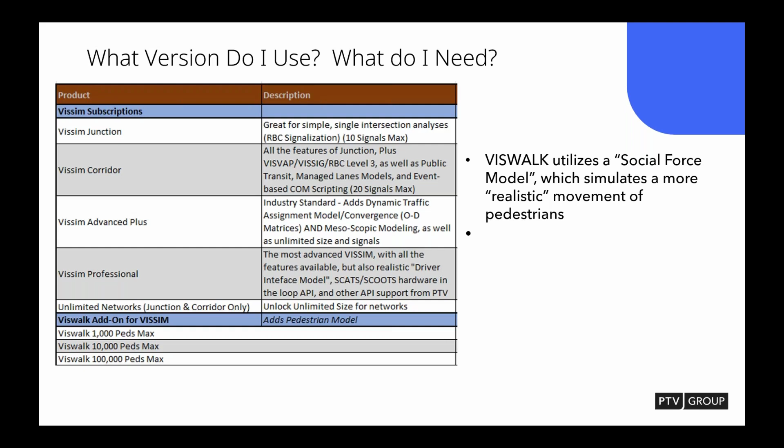When we're talking about VisWalk, some people do use it as a standalone. I have seen it, but most people come back to me to get VISSIM. It's designed as an add-on for either 1,000, 10,000, or 100,000 pedestrians maximum at any one time. So that's within the model at one time. So if you have millions over the course of a day, but no more than 10,000 at a time, that might be for you.

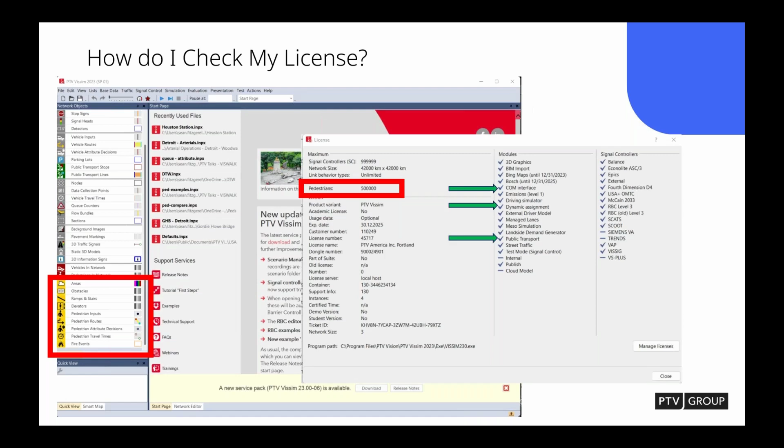So I recommend you figure out what you have. You want to go up to your help and look at your license. Here I pointed out a few things on your screen. Here you can see your number of pedestrian licenses you have. You want to look for things like dynamic assignment, that shows you Advanced Plus; public transit, that shows you at least Corridor; COM interface, Corridor; your different signalization features. So once you know you have that, you will know what features you can use going forward. All right.

So if you want to back up all the way to the beginning, the very basic way of pickup and drop off in simulation is basically a quote unquote handoff between the pedestrian and vehicular environment in both directions. So your VisWalk handles all forms of pedestrian traffic, while VISSIM handles all wheeled traffic, including cycles, which I didn't have in here. And VISSIM and VisWalk is really the only truly native pedestrian vehicular model of all the models. And I say native, i.e., push button and it works. They hand off perfectly between each other.

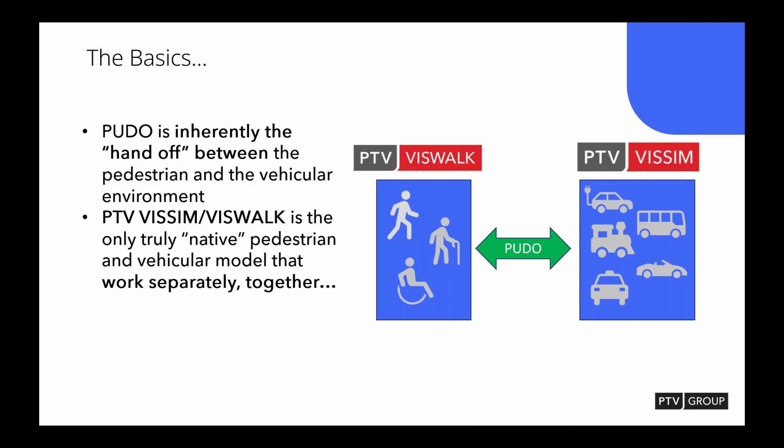So my favorite method for doing pickup and drop off is what I call the public transit method. And the reason why is because of the advanced ability to create, track, and analyze how people are getting in and out of vehicles. And it's really quite cool, and it's the only program that does this so accurately, which also in turn allows for realistic replications of the delay time due to boarding and alighting.

If there's a lot of people crowded, it takes longer to get in around them and into the car. If the doors are all the way in the back or on the other side, if they're double parked, all of these things are relevant to the operational impacts, both to the pedestrian and the car picking them up, as well as the other pedestrians around them and the cars around them as well. And with the VISSIM VisWalk interaction, you can get all of these things both in the input and the output direction.

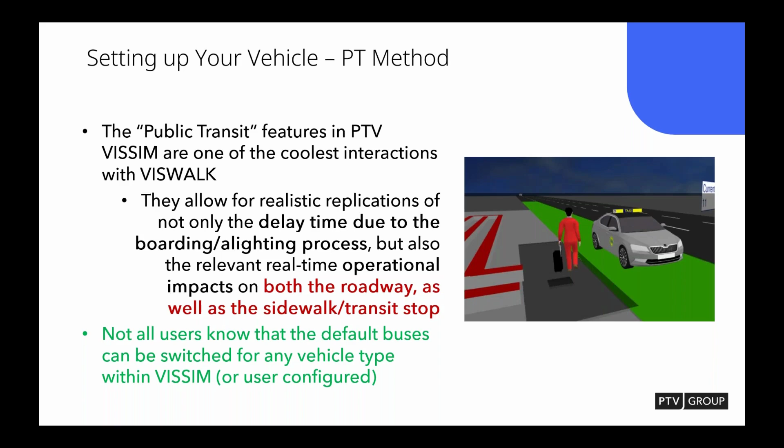Very few users know that the buses can be switched to really any vehicle type within VISSIM or user configured. I often, when living in Europe and in New York City, would just make my own that didn't exist. So, got to ask yourself, this isn't the only method. Is this method for me? The pros: most realistic boarding and alighting. You get all the delay waiting statistics, the density analytics statistics. What this is really great for is drop off.

So you can set all kinds of vehicles to drop off, and then when the vehicle drops off, it automatically creates the pedestrian and creates them into the VisWalk world as a starting point. So you don't need to be like, when the vehicle arrives, create a pedestrian. All of that has happened natively with VISSIM.

The cons: it's significantly more demanding. The way that it's designed from scratch is that public transit has schedules, so they want you to put in the timing. In the past, we have fixed this by using flight schedules and statistical analysis. You can use attribute selection and, in the past, scripting to get a controlled distribution of vehicles this way, but it's really much more difficult.

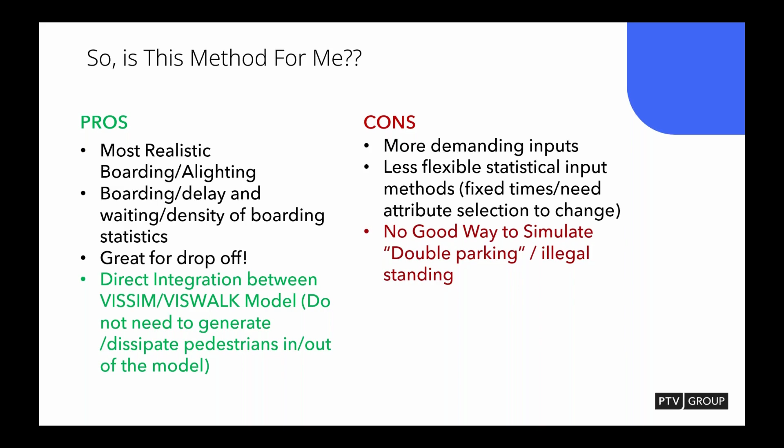And there's really no way to simulate double parking or illegal standing because the public transit vehicle needs to be next to the curb. All right, it really wants me to move to the next one, so let's just go to VISSIM.

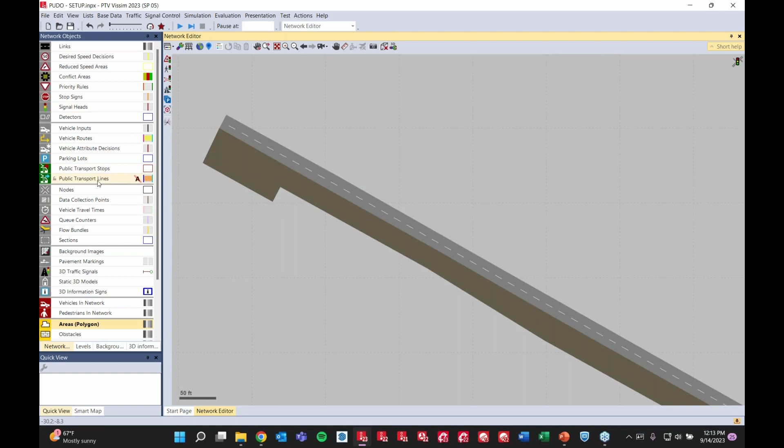Today, I'm not going to be showing the crazy, amazing Detroit Airport. I'm going to be showing simple stuff. All right, so the simple: you've got a road and you've got a thing here, right? So when you create your public transit line, let's come over here. You'll see here that you have your vehicle type. You have all your built-in ones here, but I don't really want to use any of these. So let's just keep it like that for now, right?

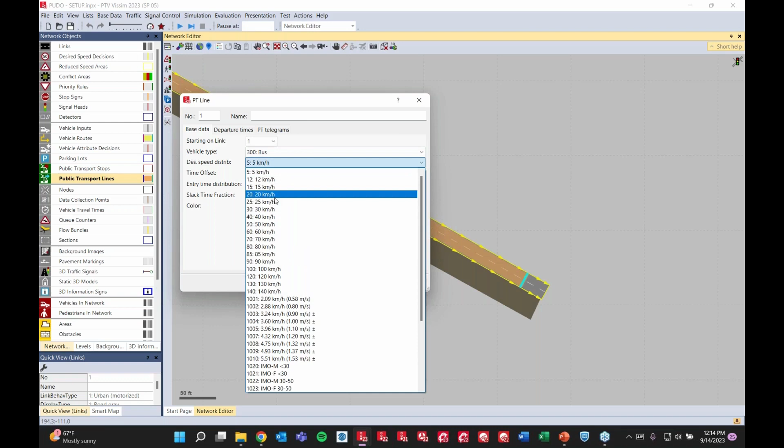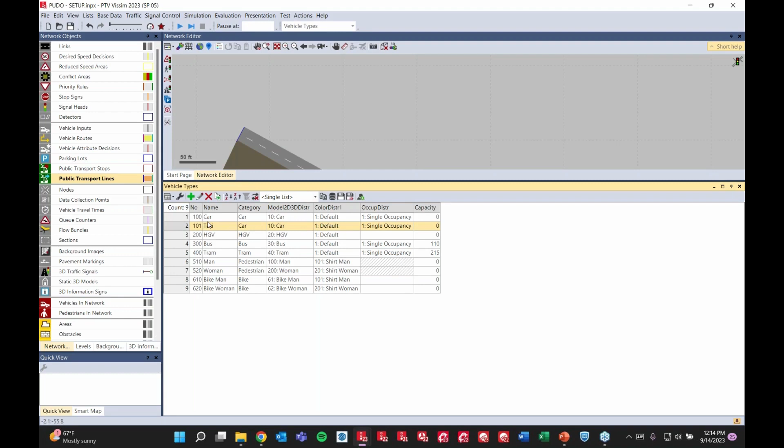So I'm going to come in here to my vehicle types. I'm just going to duplicate this guy here. Let's call it 101 taxi. All right. Perfect. Now I've got that taxi. Here I can change the capacity. VISSIM isn't really designed from scratch to have vehicles be carrying people in and out for some reason. So here I like to set the capacity to 1. You can do 2, 3, 4, whatever. For the simplest way, I like to just say 1.

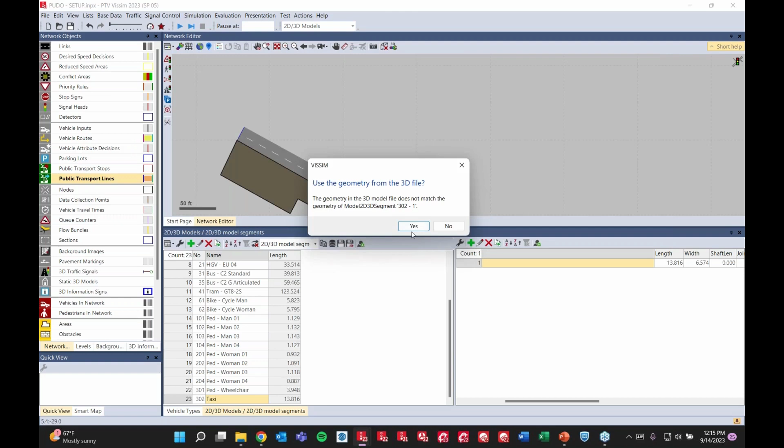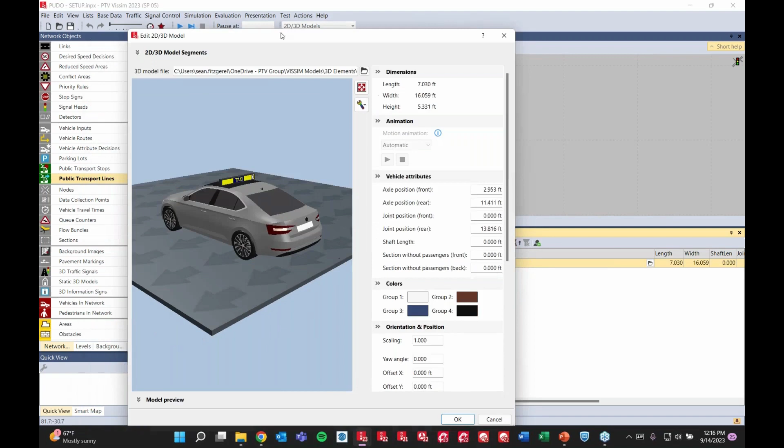Let's just for fun also create taxi. I can go in here and I can add here. All right. I don't know what just happened. Okay. There we go. So now I have this available here. And I want to go into these 3D models.

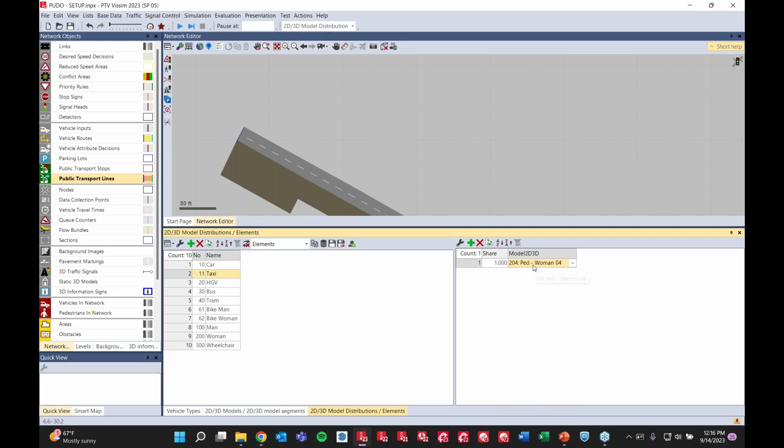This is why I like to show this, because it requires a few pedantic changes. So I'm going to bring this. I don't see my taxi. Anyway, so then when you come in you can change this here. And so when you run your simulation, you have the vehicles like that. See, this is the hard part. You actually have to put in your rate for it, or some kind of manual thing.

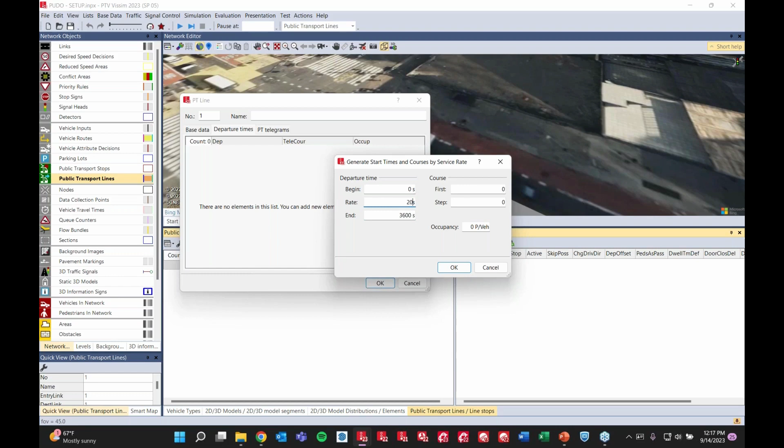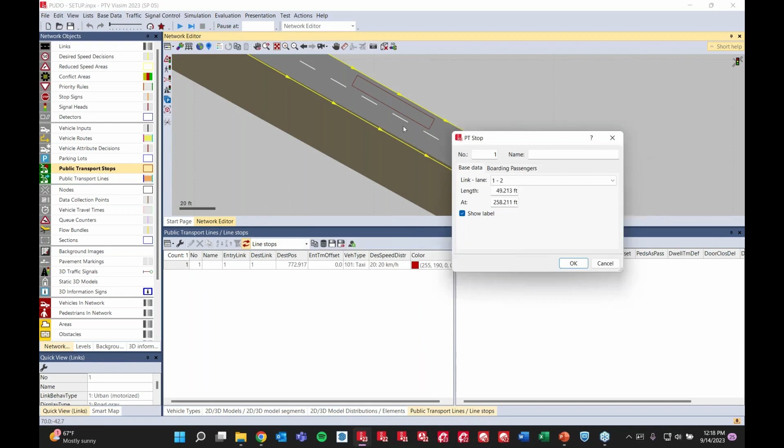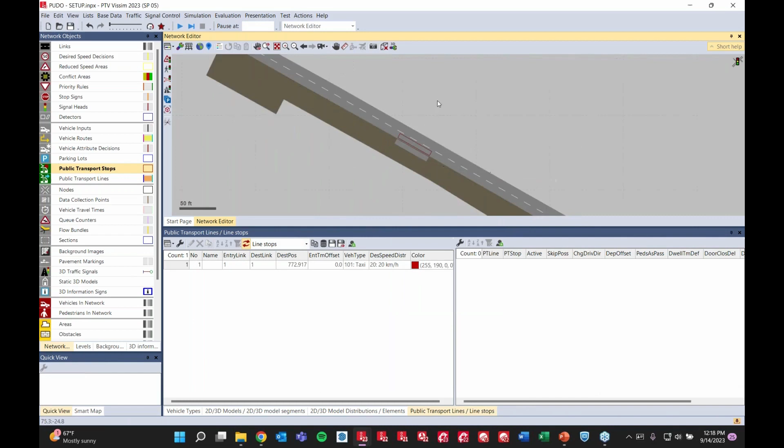All right, so let's see if that works. Let's slow it down a little bit. All right, so I didn't put in the taxi, but now you can see that the bus is a car. All right, what do we need? We need somewhere for it to stop. Let's get the transit stop there. Now we're going to add here. Okay, and let's make platform edge to the right. Okay, so with those few clicks of a button, now we have our general idea of what's going on here.

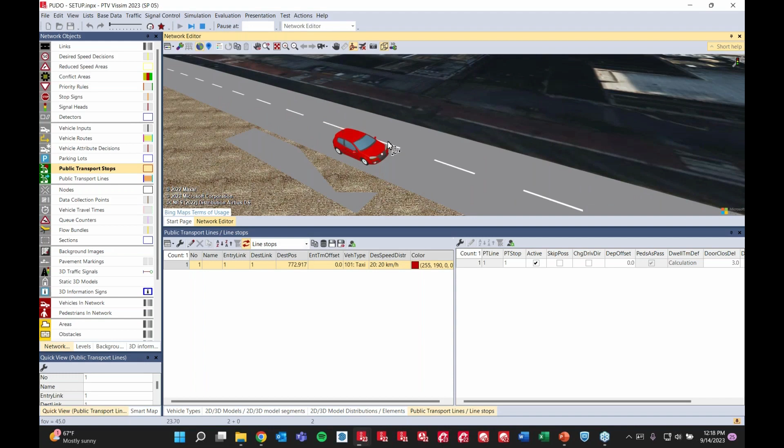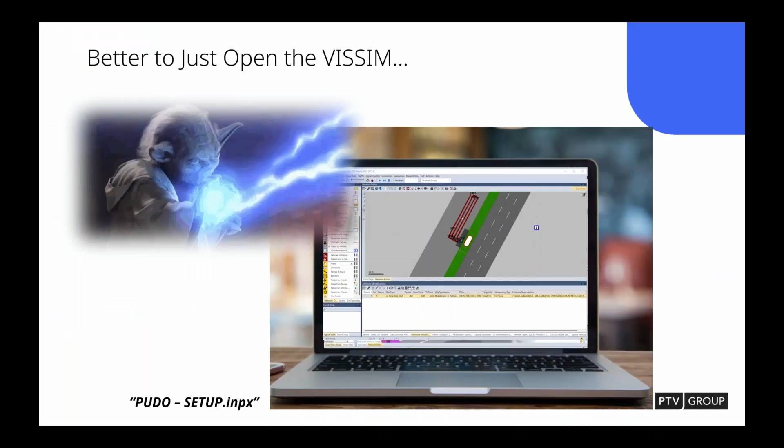So now vehicle should, yep, there you go. All right, so nothing's happening yet. So that's set up. So let's come back to that in a second. So that's how you set up a vehicle. That's simple. I know it took me a couple of steps. You can add anything you want. Some people like buses, cars, trams, Uber vehicles. I was showing you how to add that Skoda vehicle. That's the one we used in Ireland. So let's move on real quick.

So before I completely set this up, this is what I wanted to show. So doing pickup and drop off, this is really the simplest way to look at it. So the imaginary line between what I just created, you can see there the PT stop in orange and the VisWalk curb waiting area there. Oh, come on. In blue. And then your vehicle approaching. And this is a two-way thing where people can pass on and off.

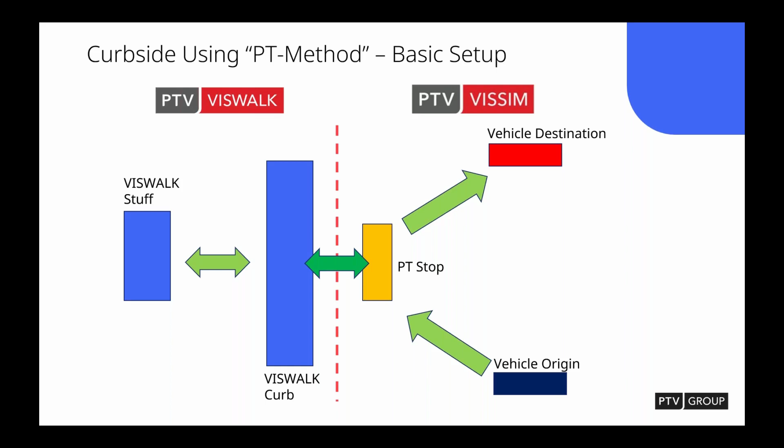So once the pedestrian is released out into the VisWalk model, it does VisWalk stuff as normal. And as the VisWalk pedestrian gets to the VisWalk curb, that is the end of its journey. But once it gets into the vehicle, that is the beginning of the VISSIM journey. So that's the simplest way to think of that. I wanted to show that before I got into this next thing. So if we bring this back up here, okay.

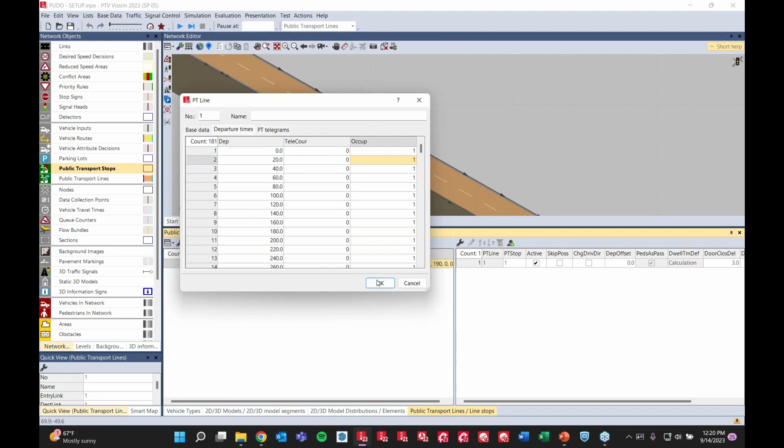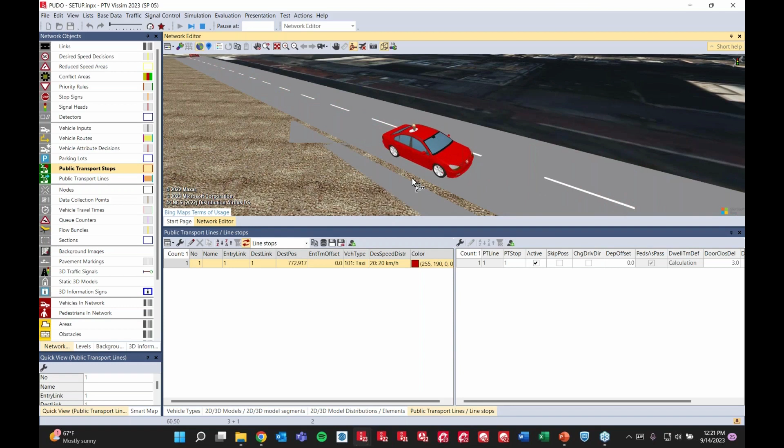So the reason why that wasn't dropping anything off was because we need to go back in here and change this guy here to 1. I believe if we change it to more, it won't do anything. So let's try that again. So what do we think will happen? The pedestrian has nowhere to go, but VISSIM should still try to emulate it. Yep, there you go. All right, so they disappeared. They have nowhere to go. Here comes another guy. It's using the default distribution of pedestrians right now, but you can edit that. You can see some of my old versions, or Levi's old versions there.

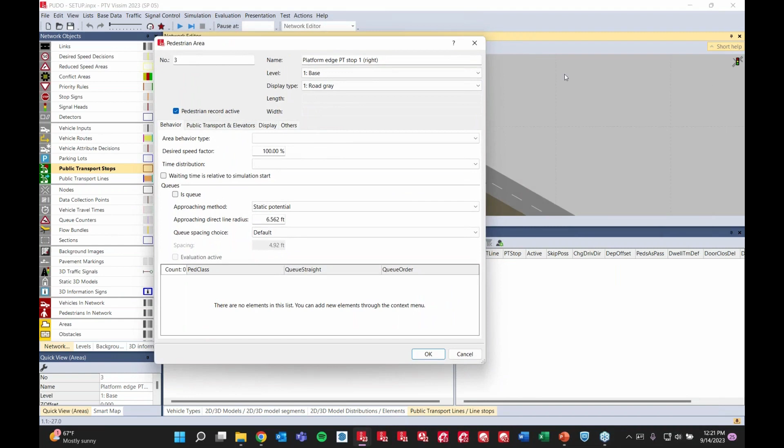So we need something for them to do. So let's say, all right, let's do that. All right. So now they have somewhere to go. Let's just make sure that's not set as a waiting area. Not a waiting area. Okay. So I need to send them there, so I'm just going to add a simple pedestrian route. And yes, I know all these examples are super simple. The idea is not to teach you every little single detail. The idea is to show you what can be done. So that should change their minds.

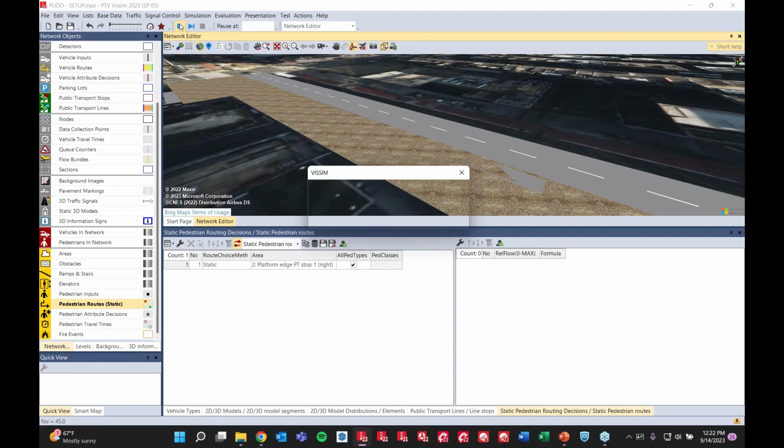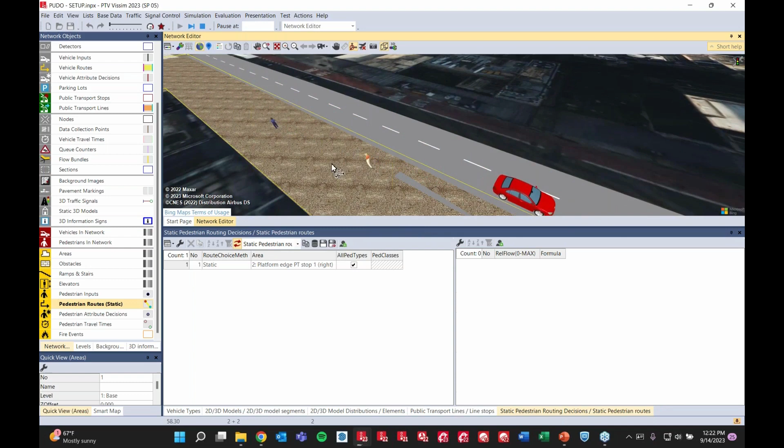Yeah, super simple. Okay, so once you create them in that way, they're now at the curb. Sorry. They're now at the curb, and what they're doing is now VisWalk. So anything you put in here, building, whatever, waiting curb, and vice versa. I will do vice versa in other examples. So let's just move on for sake of time.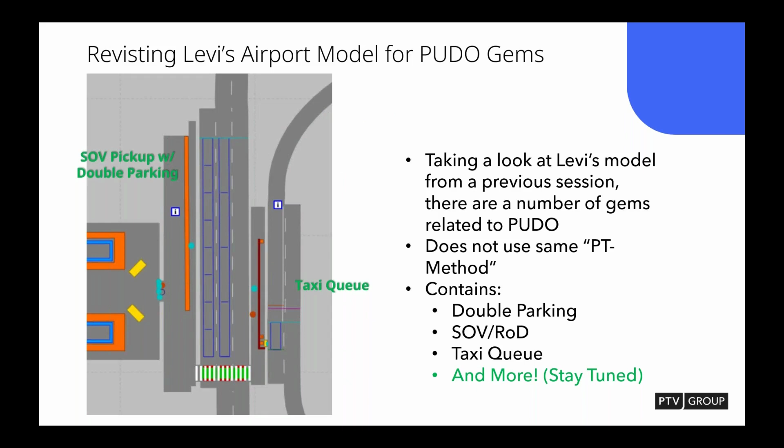So what is the difference? They're both accurate and they're both good practice methods in VISSIM, but they're used for different fidelities, really, honestly. The public transit method is to simulate specifically the action of boarding and alighting. I have no idea why it's doing that. Whereas the parking lot method does a lot more with double parking, curbside, road impacts, pulling in and out, and that kind of stuff.

And it uses attribute selection to generate cars and pedestrians. So basically, the pedestrians wait at the curb until a car comes, and then they disappear, and then the car takes off. So it's not the actual action of boarding, but to simulate both the capacity at the roadside and on the roadway itself.

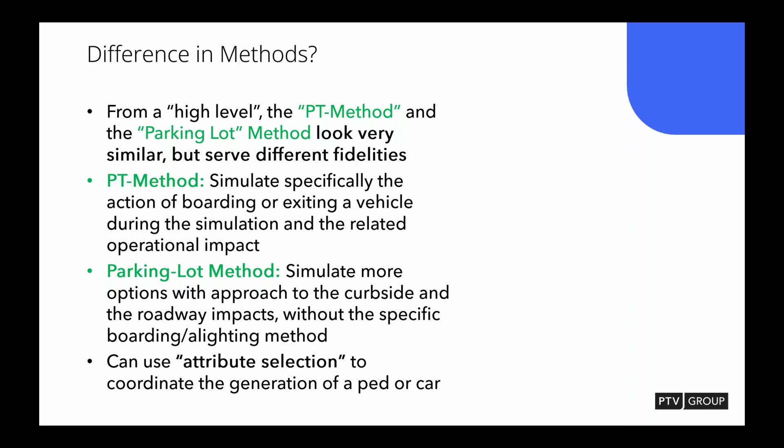Let me see if I can open that. Oops, my apologies. That model. I'll hide this for a second. So this is interesting here. So you can see the way that the parking is. So let's run this guy.

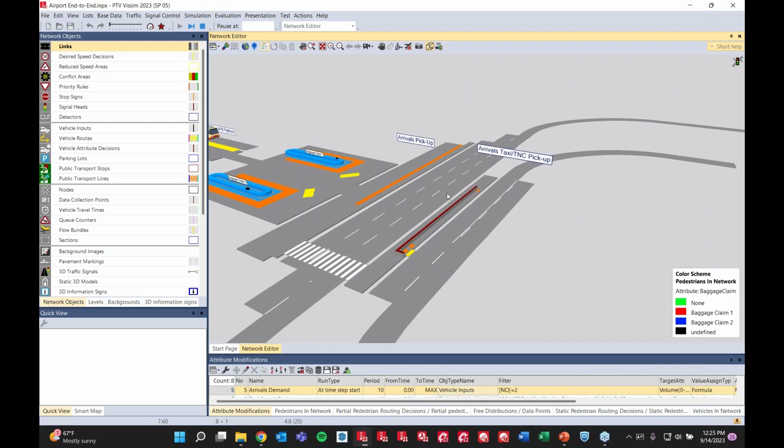All right. So having the double parking allows for the vehicles, and the way that it's set is you have average waiting times of the pedestrians, and you have average waiting times of the vehicles that correspond. And the generation of the different things are based on similar things. So when you do it in this way, you can see that the people are not particularly boarding the cars per se, but you're getting a more accurate curbside operations. You can see with the vehicles moving that looks a whole lot like a big city airport, a whole lot more than the one I just showed you. But it can't specifically replicate this.

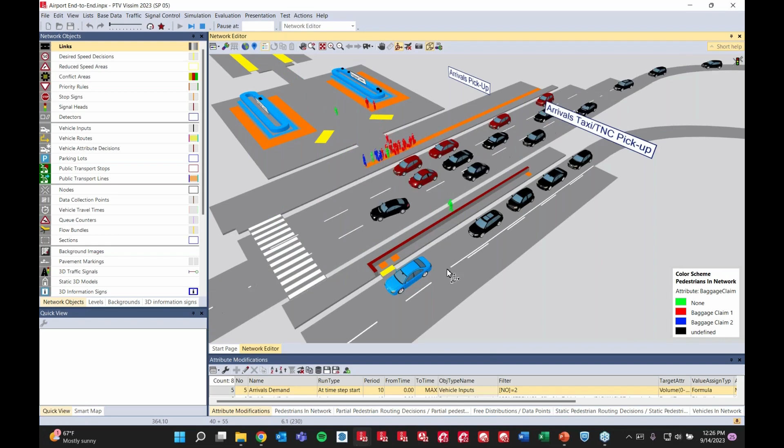The same with down here in the taxi queue. This taxi queue uses a parking lot method. It allows for better holding of vehicles and more accurate routing, but it doesn't show the actual boarding and alighting. Let's see, yep, see, it just kind of disappears. Both methods work. It really depends on what you're looking for. I think that this is really the best way to do operational analysis for curbside at something like a train station or an airport.

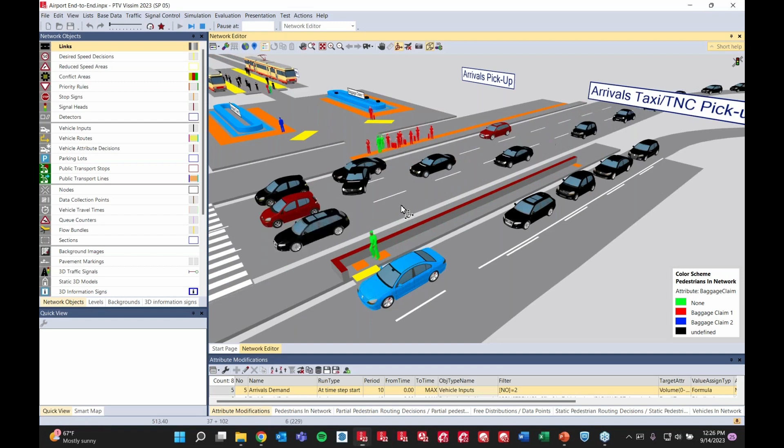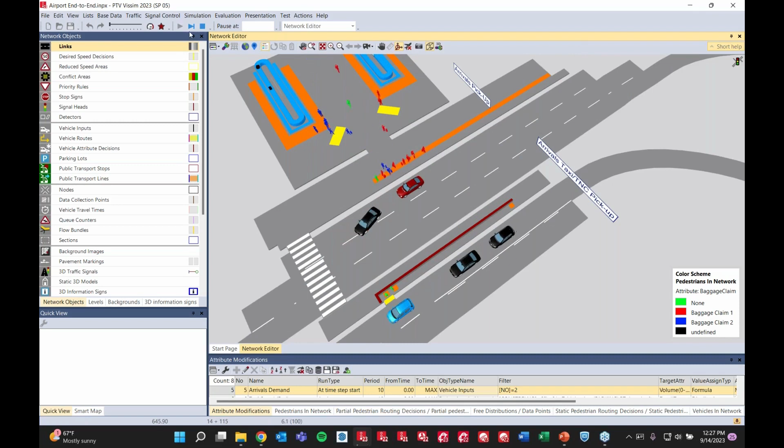And the interesting thing about that is, while this doesn't give you the boarding and alighting statistics and the density and the waiting times for the public transit, it does allow for more color coding features and more density analytics at the curbside versus the public transit method. All right, let's just pause that guy for a second. Let's see what else fun I can find for us.

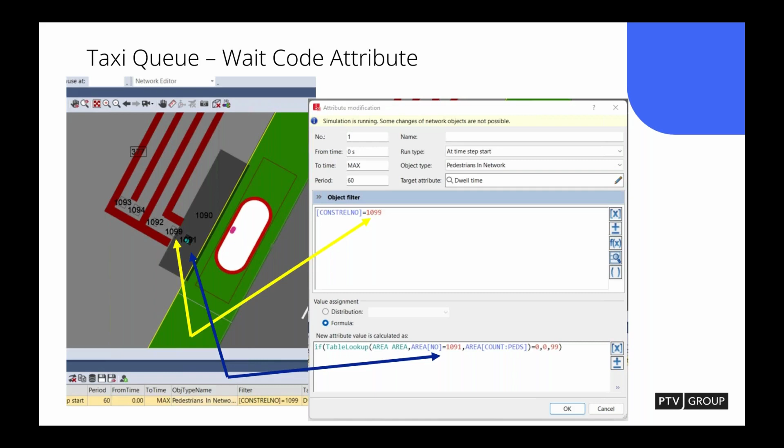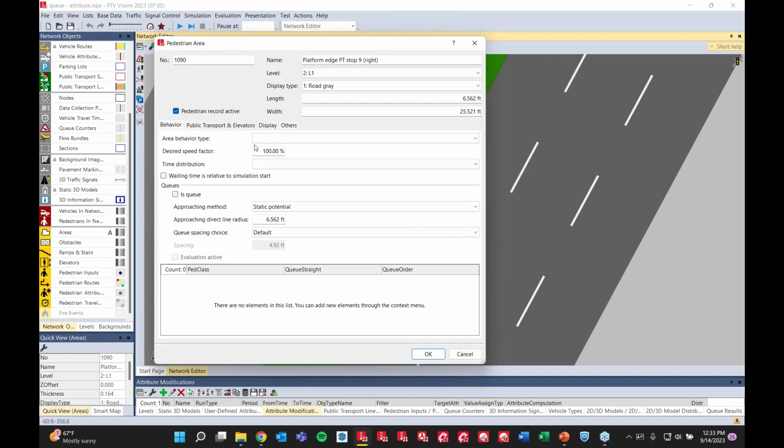So let's just take a quick look at that. I know I just showed you the code, but there's a few elements involved there. So if you see here, to build a drop-off, I said earlier I would discuss the opposite, which is pickup, which is the exact opposite, right? Here you've got your public transit stop on the roadway, and then you've got your platform edge. Here under public transit, you can see platform edge for PT stop 9.

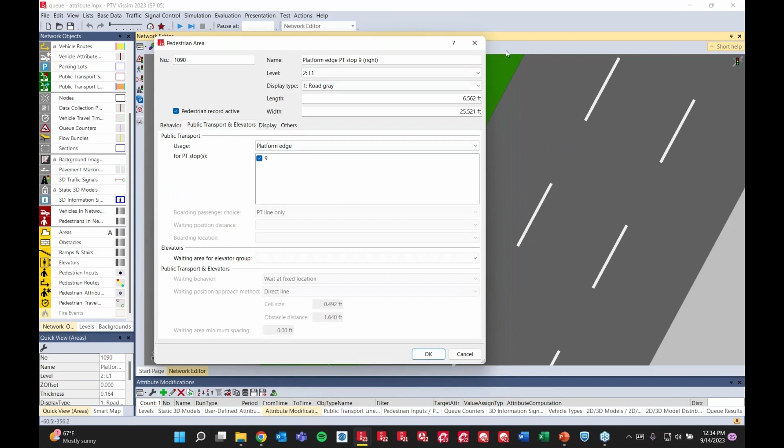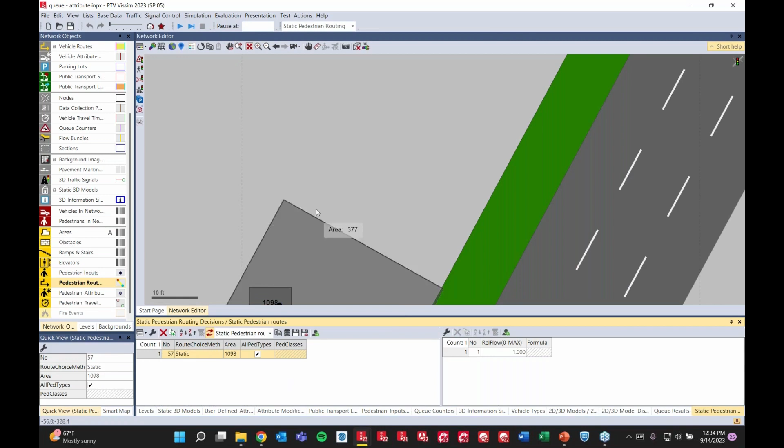And then this is one of the things that people often get wrong about public transit in VISSIM: you need to have a waiting area within the public transit platform edge. So you can have as many as you want, but they need to be within here. So I've got this guy here. So then let's take a look at this route for a second. Okay, so let's take a look at this guy. So here you can see I've fed him pretty circuitously through the snake queue.

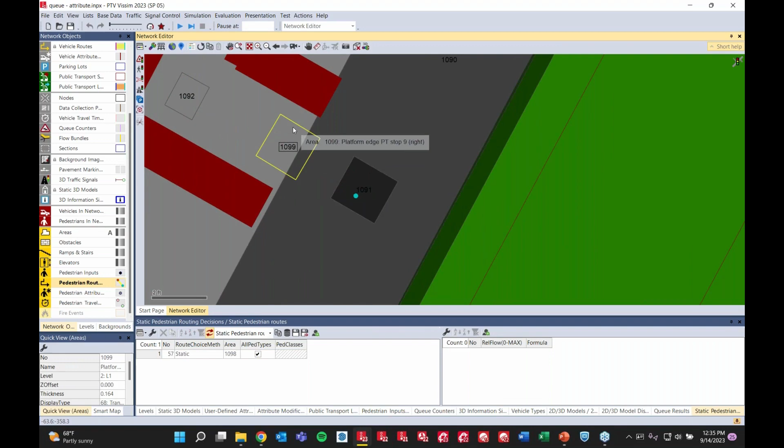And then in this case here, he comes through here. And then once he gets here, you can see I've set the time distribution to gate holding time. Apparently I set it to an hour. You can set this to whatever you want, the time distribution. So once the person reaches this, they will wait for this amount of time.

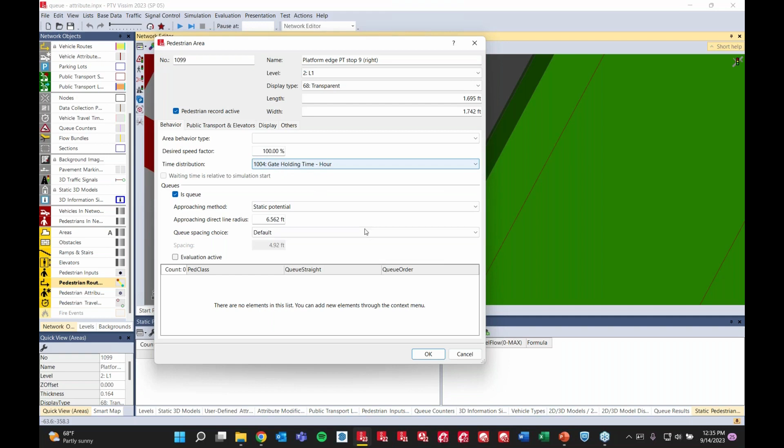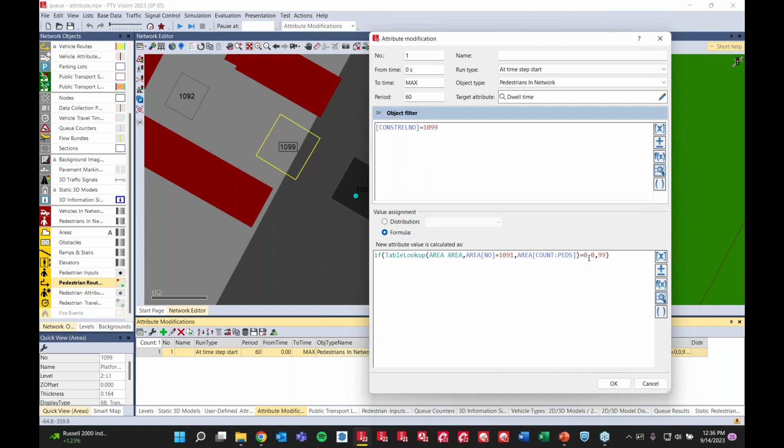However, under action attribute modifications, you can see that I have, here's your little prompts here. So when you're creating one of these guys, you have to pick your attributes, and then you can see construction element 1099 there. So every time step, it's going to look at this and it's going to say, if the count of pedestrians on this 1091 is 0, then set the dwell time to 0, which will effectively make this gate open, and then people can go through. I know this is a weird example, but it is an example that works for pretty much everyone.

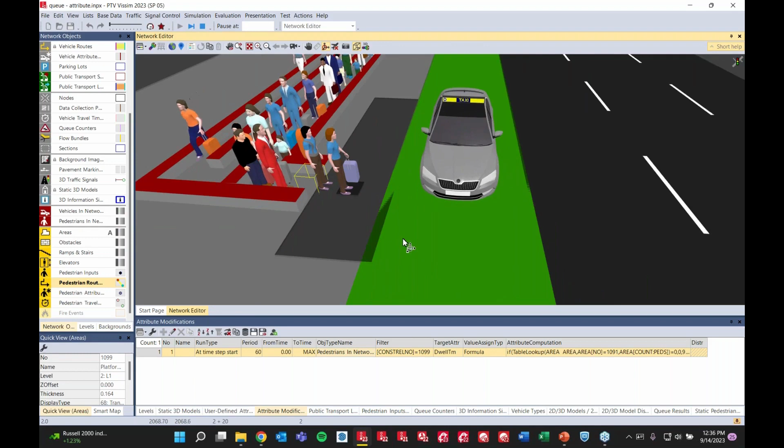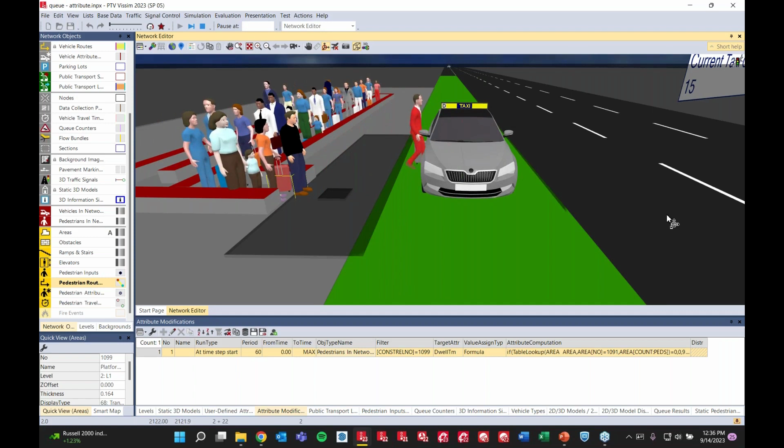So in practice, you can see here, there's my Skoda. All right, so people don't move to the next point until everything in the system tells them. So anyone that's created a queue can tell that this is ridiculously orderly compared to the native way that queuing used to work. So that's what you get in the end. This can work with picking up people in individual cars. I have done this at curbsides in Europe for regular vehicular pickup. You do have to set zones, big zones for the public transit stops, but it does work really well.

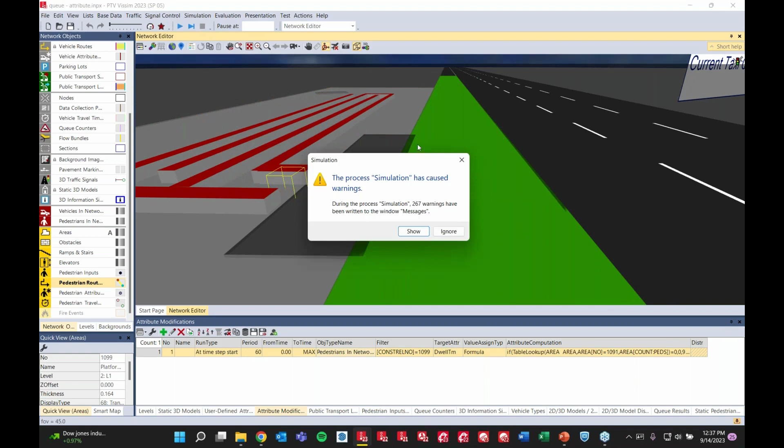So let's put that on pause for just a second. Let's talk a little bit about demand generation.

Going back to Levi's model, something that I really like from it is his demand generation codes. I think this model was made available, but there's a couple of codes in there that generate vehicles congruent to the number of pedestrians approaching the curbside.

So basically, they're checking every time step that a pedestrian is approaching the curbside, and they will create vehicles to the appropriate area. This would be directly applicable to rideshare and other demand services, but I'm not going to go through it in this presentation, but I'd be happy to discuss it if you want to reach out to me.

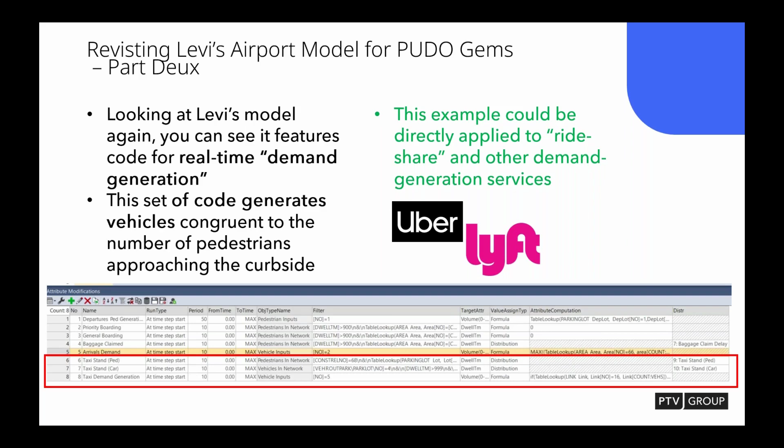So effectively, VISSIM sees the code this way. Circular code doesn't really have a beginning point, but let's say that the beginning point is the time step end. Actually, most of those codes were set to time step begin. So the first thing it does is it fulfills whatever code action. So let's say it's a normal attribute modification. Does it fulfill request X?

If yes, then move on to do something VISSIM-y. If no, then go to the next time step. And this is constantly going, right? In the case that we were showing, when people appeared, then it would go down here and create a vehicle and then move around. It would keep going. You can also add third-party code.

This is something I used to do a lot. So external API, right? Is that ride share? Is that bike share? So it would go here. You can add Python scripts. You can add coding. You can add external files. You can add third-party stuff.

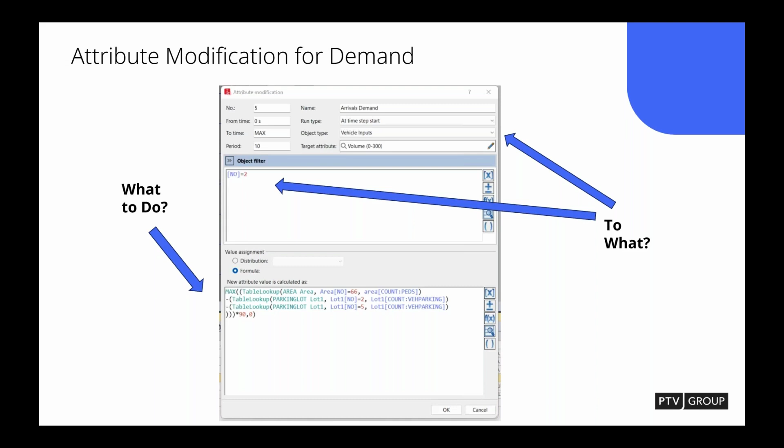Attribute modification here you can see is set for vehicle input type, which is for demand generation. And then down at the bottom, you can see how the new attribute is created, right? It's looking at the max of several values. And when it's doing a table lookup, a lot of the VISSIM data is created in Access tables and Access databases in real time. So that's what it means by table lookup. So it's checking all the different things to make sure they match.

I left in all my Star Wars references from the one in May. I can't believe it was May already. Okay.

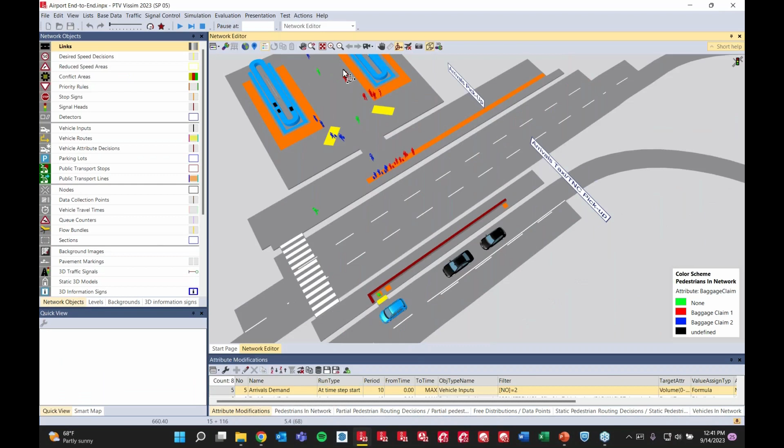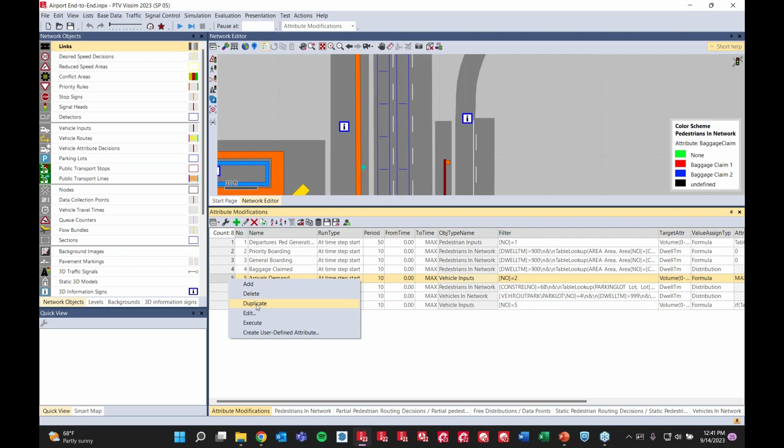So this model actually has 8 different attribute modifications in it, right? It's got pedestrian generation in it. It's got arrivals demand generation for the vehicle input. This is actually the one I just showed you here. So it's looking at vehicle number 2, which I believe is the taxi input. Nope, it's 5. So 2 is up here. That's the vehicle input.

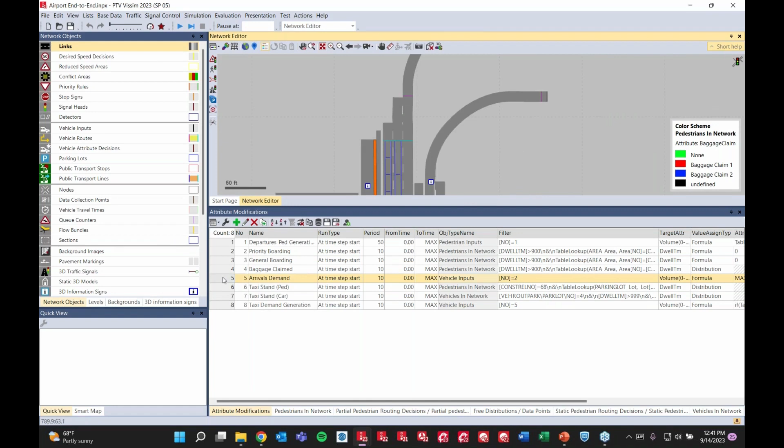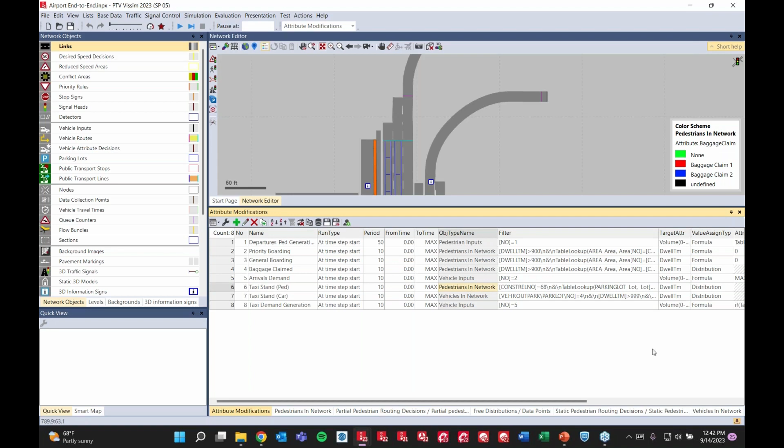So it's looking at 2, volume, and then here you've got your different tables that it's looking up. And then also you have pedestrian inputs, pedestrians in network. You can change here. Instead of using a formula, you can actually make distribution edits, dwell times, that kind of stuff.

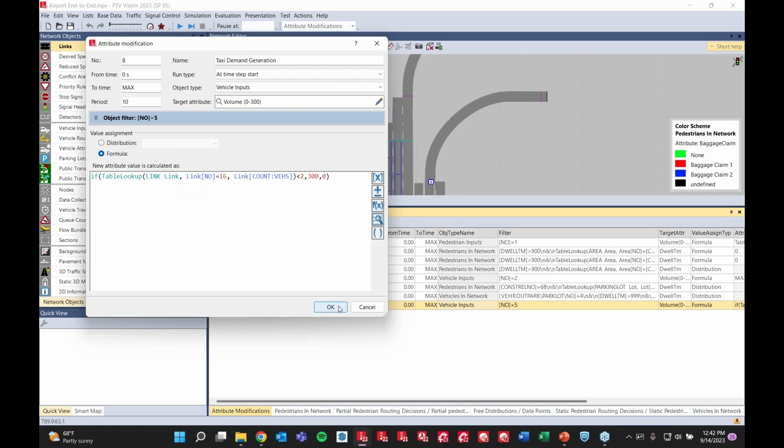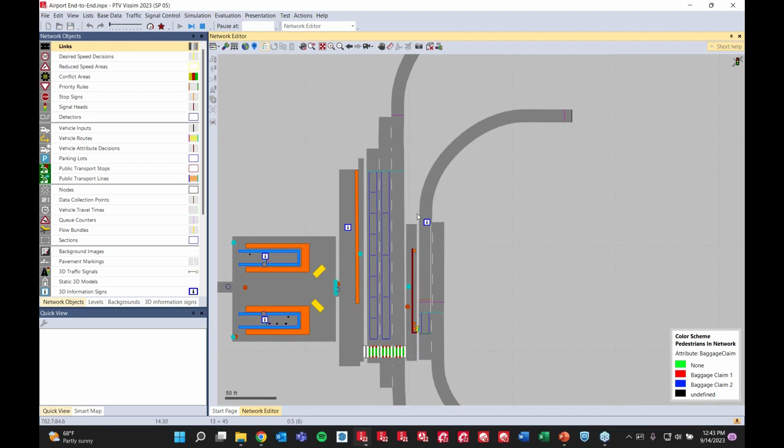There's one here that creates a taxi when people create, right? Number 5, that's the taxi here. So I recommend that you go around and mess around with this guy. It's really fun. But you may not realize it at first when you're first looking at it. For example, down here at the taxi generation, no taxis are coming. And that's because there are no people here.

So what this is doing is it's actually creating the demand as it's necessary. And while it can be arguable just how realistic demand creation is, whatever algorithm you use, the taxi here basically functions as an on-demand service. Many countries have this at their airports, but for us, this would function much like a ride share service, right?

And in that case, what you could do would be to implement distributions and waiting times, and just exactly when a vehicle is created for the person relevant to when it arrives. So some people will get their Uber while they're on the airplane. Some people will get their Uber while they're at the curbside. Some people will get their Uber while they're at the baggage. You can add these different things in, and you can do scenario analysis of the different kinds.

But one of the interesting things about this is whenever you try to aggregate or estimate or judge volume based on fixed demand characteristics, i.e., you put in 1,000 people and 1,000 vehicles, you'll always get some kind of weird, incorrect peaking characteristic, or vehicles waiting for a long time. Or in my case, with the PT thing, if you enter it incorrectly, the taxis will leave before the people get to them, right? These are all just inefficiencies of how they were designed.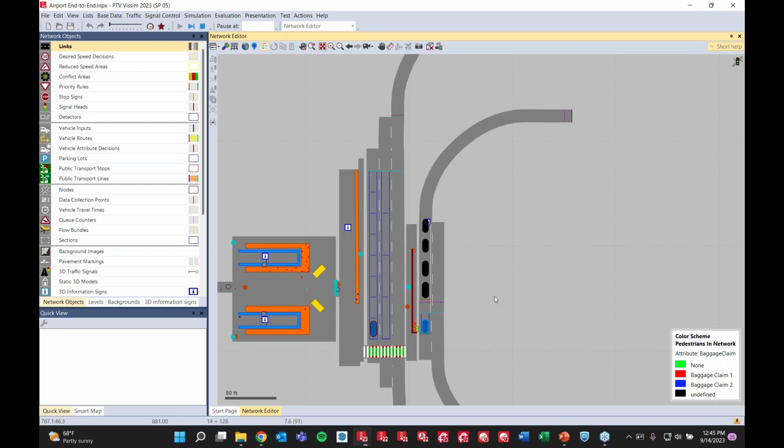So using on-demand attribute selection in this way, and again, I do recommend you go back and watch Levi's presentation about attribute selection, does allow for flexibility in demand generation, demand expectation, and the realism of just how the two models should work together in the temporal space.

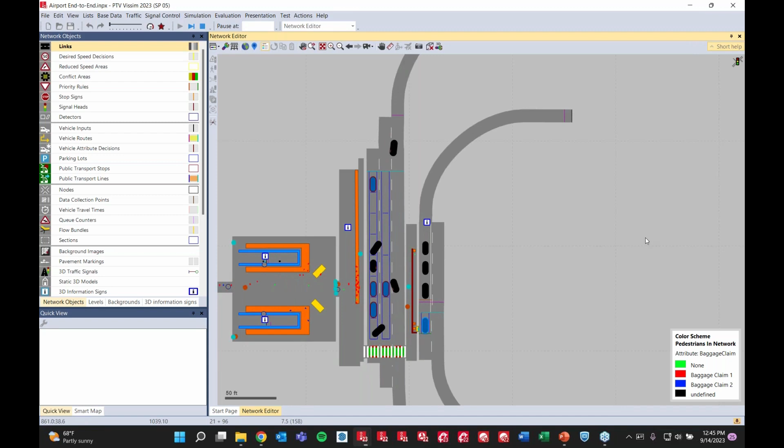All right, let's pause that guy for a second.

So just a reminder here, I'm not going to talk a lot about evaluations, but I just want to point out some area measurements, do some good density curbside statistics. Data collection points can collect all kinds of vehicular data. You can trigger things like an ATR or like a ground sensor, whether it's triggering an event or whatever. You can use attribute selection to look at your data collection points. Your parking lots stuff, you can look at your PUDO operations.

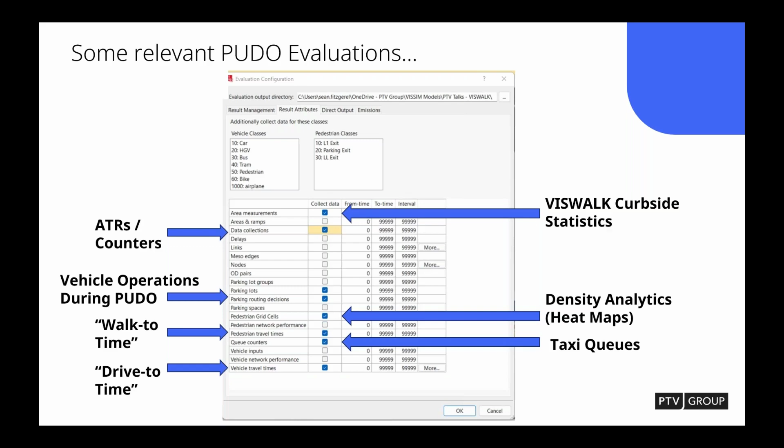Pedestrian travel time and vehicular travel time can work together in concert to look at transfer times, as well as connections between rideshare services, mobility as a service, connection times, drop-off locations versus destination, that kind of stuff. With your pedestrian grid cells, you get your heat maps, and then you can do queue counters and stuff to do queue analytics.

Just a couple of pictures in here. These are all native to VISSIM. These are not third-party created. You've got density at curbside for a train station. There you have pedestrian density analytics for volume. These can all be viewed while the simulation is running in real time, and you can get different video outputs and stakeholder to get kind of more of a realistic idea of your space at your curbside.

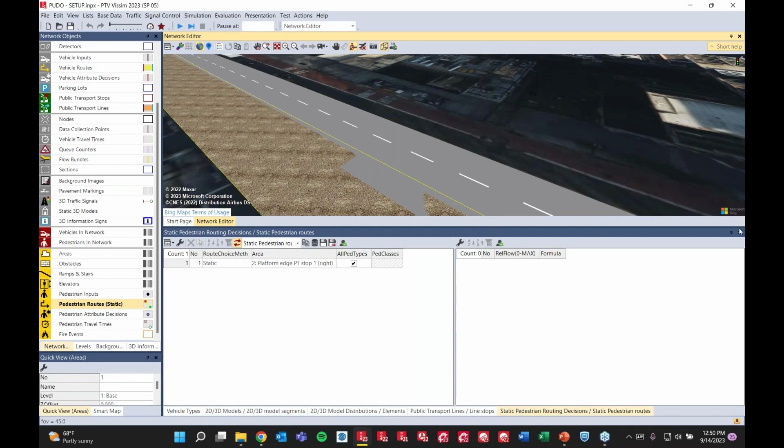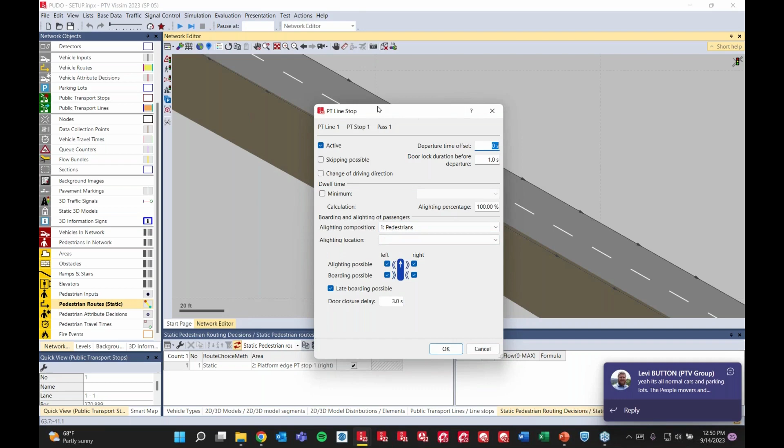So when you said pull in 100% of the time, I assumed you meant that they're not skipping, which I don't think that's what you meant, but just in case, I'm going to show that for people who don't know. So if you have multiple vehicles going through here, and you right click on here, you can actually see PT line 1, stop 1, pass 1. So you don't want skipping to be possible. You can change alighting percentage to 100% minimum, all of that stuff.

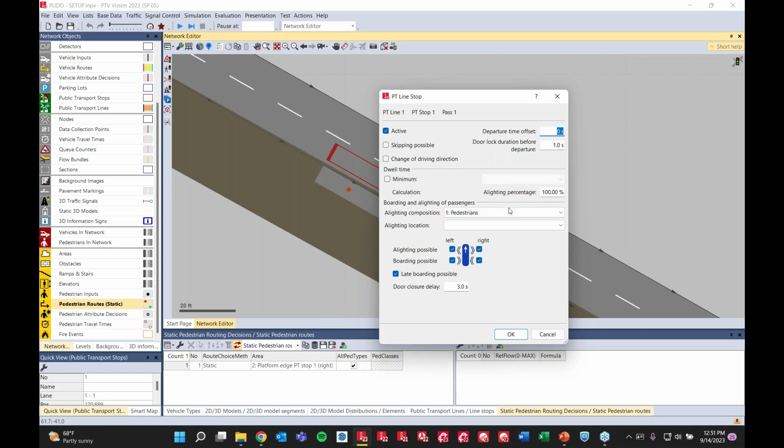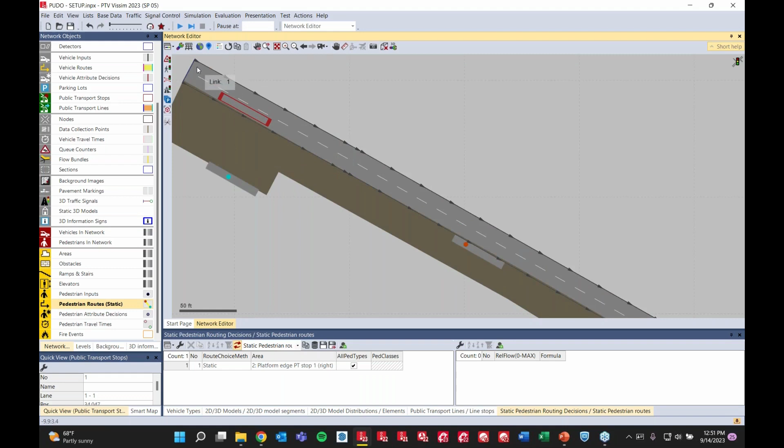However, if you're talking about the second question, which I think you have, that has to do with a lot of things. It has to do with sight distance. It has to do with lane change distance. It has to do with vehicle distance. So vehicles that are created on a link need to have the correct amount of time to change lanes and to have knowledge, right? So if you're like way back here and they're created up here, they won't have enough time to understand where they are, and then they'll just jut over.

Also, if they're a long vehicle and the stop is about the size of the vehicle and you have multiple lanes, sometimes they'll just go at an angle. That has to do with lane change distance parameters. If you want them to be straight at the curb, they have to already be in the lane by the time they reach the transit stop.

If they need to be 100% parallel to the curbside, that's probably a calibration parameter. So I answered two questions, so hopefully one of them was the right one. Yep, I would assume so for sure. Second set of items there.

Perfect. Okay, next question. Is there a potential to provide more random arrivals for pickup drop-off vehicles rather than a determined schedule? And the second statement says it would be preferable to show peaking characteristics that are variable to reflect event conditions, for example.

Yeah, so if you're talking about the public transit method, there are a number of methods. In the past, when we were doing airport work in Europe, we used a schedule of flights where you had percentages of people arriving over time. So we created peaking characteristics in Excel and put them over into the arrival and departure times. So that is really good for something that's predictable, like flights, trains, school, that kind of stuff.